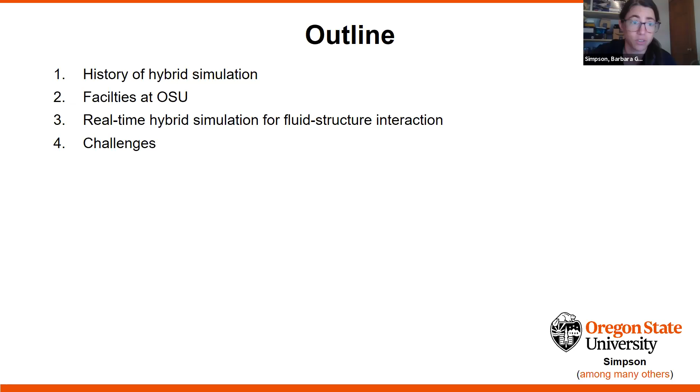Let's start with the history of hybrid simulation. I like showing this slide because it goes to show you how much times have changed. The original online testing method for hybrid simulation, the first publication, came out in 1975. There have of course been a number of instrumental works from the late 1970s and 1980s. When you think about how much computational power we have now compared to back then, it gets you thinking about what other problems we can start addressing, particularly with the growing emphasis on multi-hazards engineering and research.

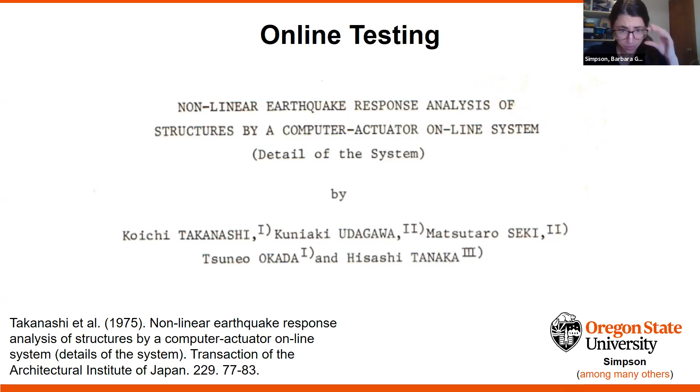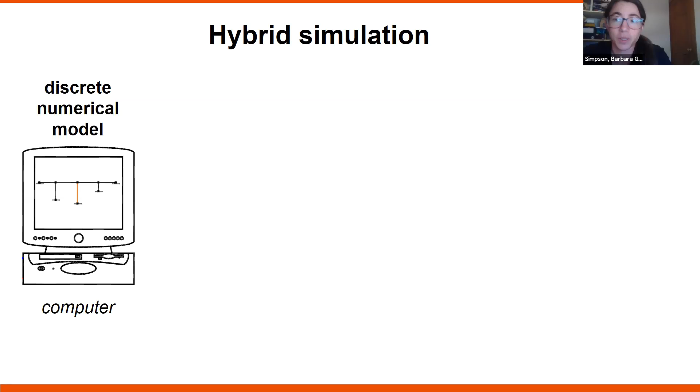When we think about hybrid simulation, we often think of it in terms of earthquake engineering problems because that's where it was originally developed. The entire idea of hybrid simulation is to take a model and split it up into some sort of numerical component that communicates with some sort of physical model in an experimental facility. This numerical and physical model are then coupled through the equations of motion, or whatever relevant physical equations there are, to couple these two systems.

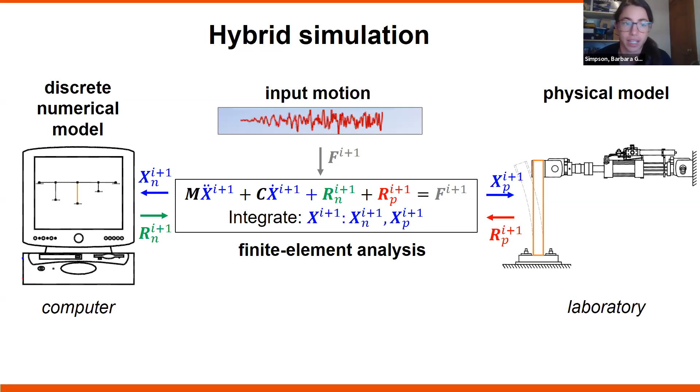Based on that equation of motion, you solve for the next time step, which gives you, based on an input motion, some sort of numerical and physical command in both the numerical model and the physical experiment. Then, based on that numerical displacement for example, you measure some sort of virtual resisting force in the numerical model, or from some sort of sensor in the physical model, and that feeds back into the equations of motion to solve for the next time step. So this hybrid simulation concept really combines a physical and numerical component.

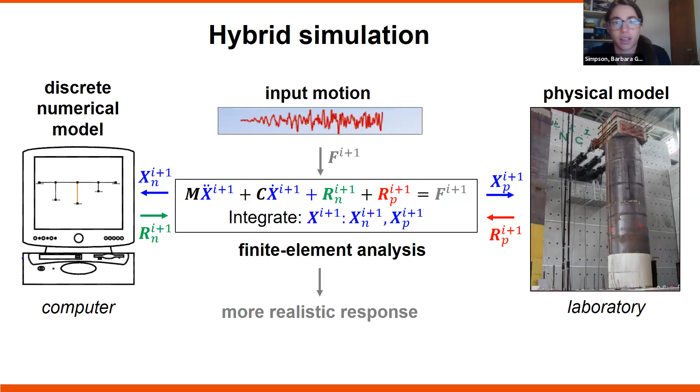Since you're actually testing a portion of the system in a physical laboratory, you can say you're combining the advantages of both worlds, numerical and physical, to get to a more realistic response. So that's the meat, or the idea, behind hybrid simulation.

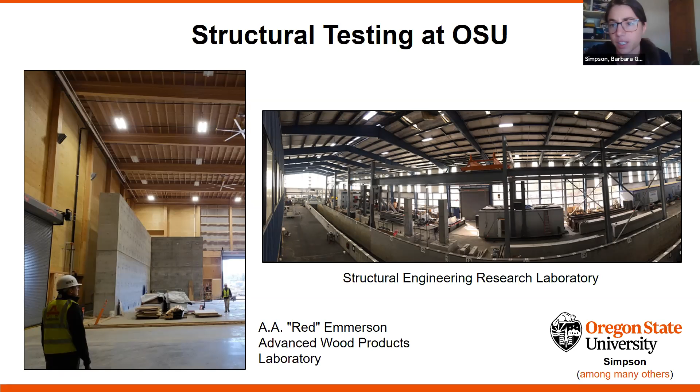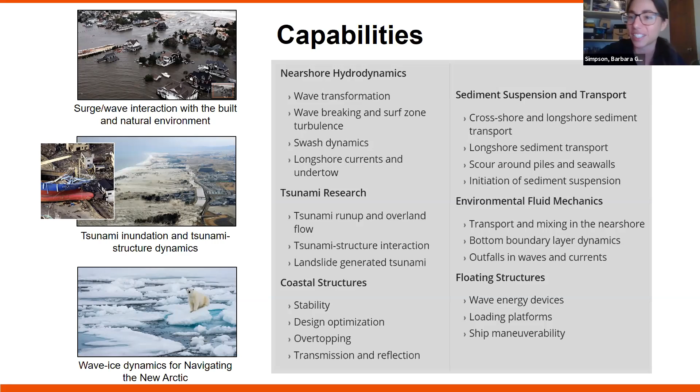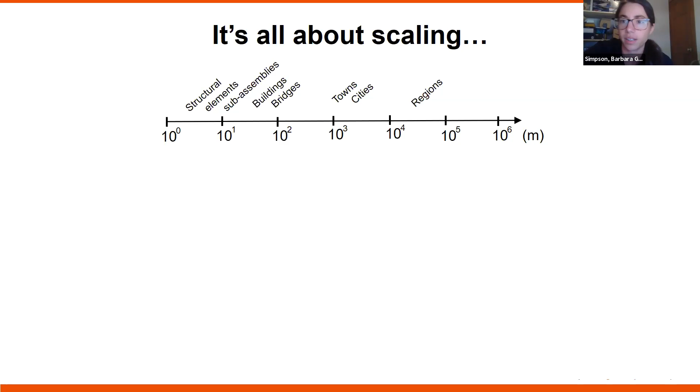For example, this was a test at 1-to-1 scale, but it's only a portion of a structure, or a partial subassembly. We can also think about testing a house, but again that house becomes small scale. And if we start talking about towns, cities, or regions, that of course comes at even smaller scale still.

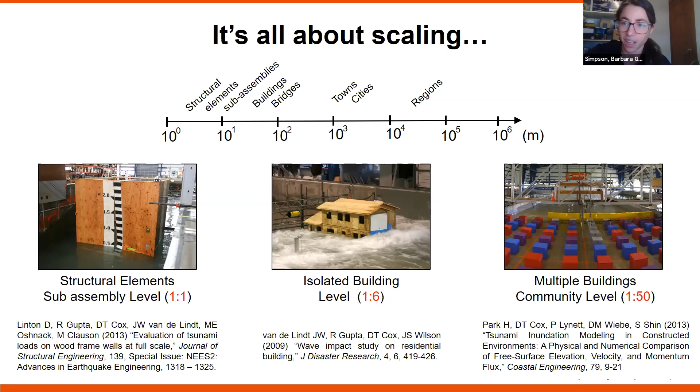So when you start thinking about how hybrid simulation can come into play in a facility like this, you really start thinking: how can hybrid simulation mitigate some of these scaling losses, or mitigate some of these scaling effects?

In a lot of these experiments, you're either making simplified or idealized boundary conditions. You're also, when thinking about scaling, often scaling according to the fluid and not necessarily the structural dynamics. Hybrid simulation is a concept that could help you mitigate some of these similitude requirements.

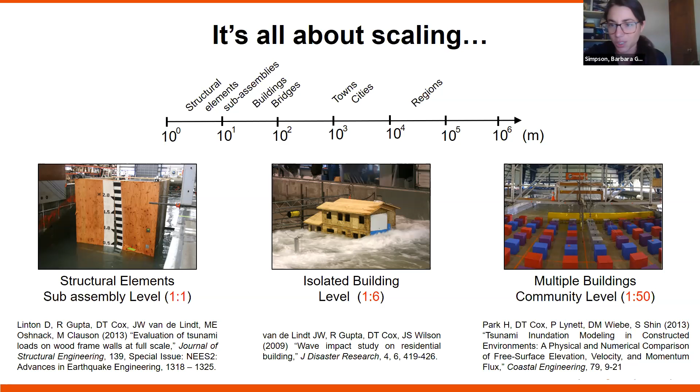So this is the experimental testing we're looking at in OSU's facilities. This is a recent experiment that demonstrates this.

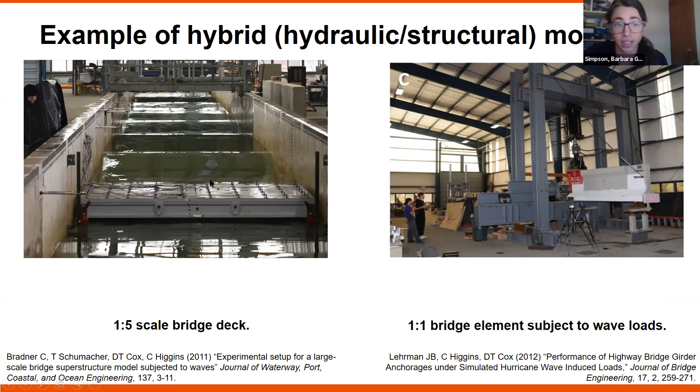On the left, we have a bridge deck, and it's actually set up with a spring. So when the wave hits this bridge deck, there's a fluid structure interaction component that includes the structural dynamics from the spring.

What these researchers did was take the load history they measured from load cells during this experiment and apply that to a full-scale bridge specimen. So they're starting to think of hybrid simulation not so much as how we traditionally think of it in earthquake engineering—combining a numerical component with a physical component through the equations of motion—but rather combining hydrodynamic testing with full-scale structural testing.

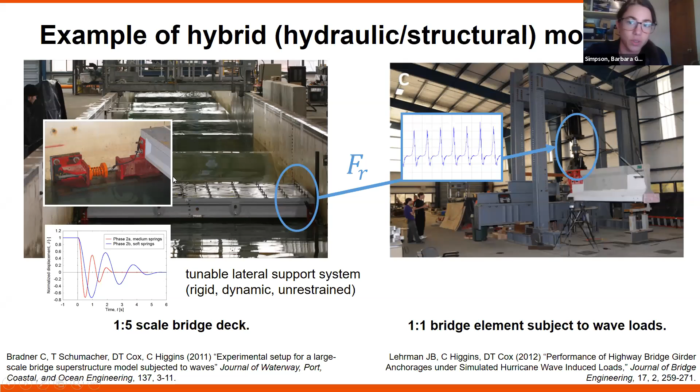So we can start thinking about hybrid simulation as something more than what we've traditionally thought about in earthquake engineering. These results are very interesting, mainly because of this figure on the left showing the actual dynamics of this bridge structure. What they found is that it actually influenced the response quite a bit.

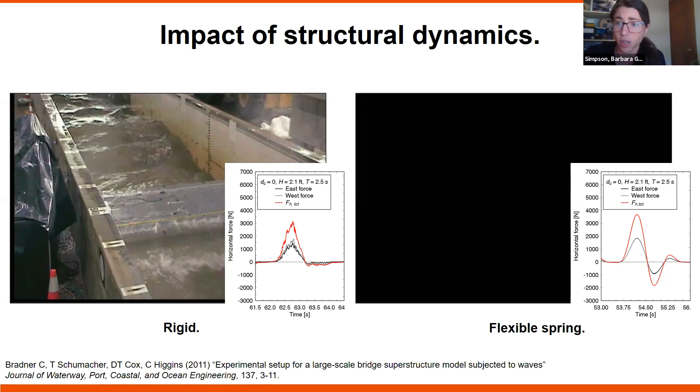As you'll see later, similar testing was also done by Denis Istrati and Ian Buckle at University of Nevada, Reno, and they found very similar results. So if you want to take into account the actual structural characteristics and dynamics, you need to somehow get around these scaling effects, because oftentimes hydrodynamic experiments are conducted at small scale and neglect a lot of the physical characteristics of the structure.

So that leads to this idea of hybrid simulation for fluid structure interaction problems. The idea of hybrid simulation, combining two things, a physical and numerical component, that stays the same. But then we can really start thinking about how we want to model this physical part and this numerical part, and how we can combine them in different ways to come up with more unique answers.

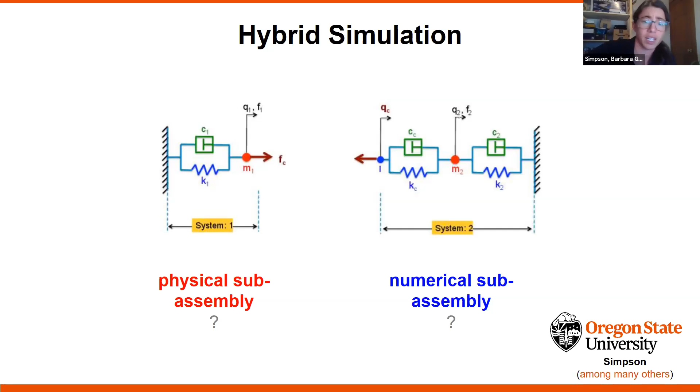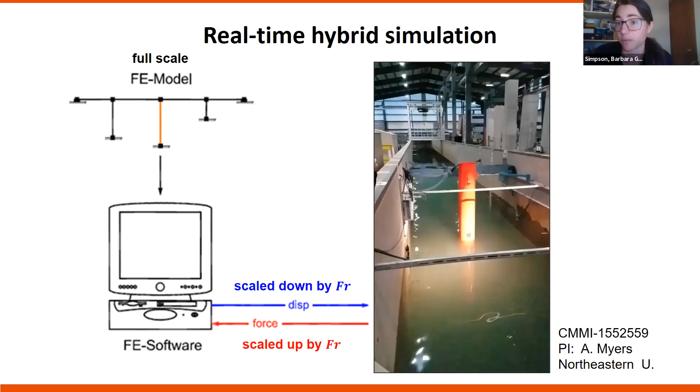And so you can imagine that because the structural model is at full scale, you can actually combine inelastic response at full scale, realistic stiffness properties, damping, for example, and then combine that with something that's small scale in the wave basin or in the wave flume. So you get around a lot of the similitude effects.

Now here's the problem. As much as I would like hybrid simulation to be like this, the fluid is actually always going to run in real time. There's really no way, no accurate way potentially of slowing down the fluid dynamics. So if this coupling is going to occur simultaneously between this numerical model and this physical model, it really has to be done in real time.

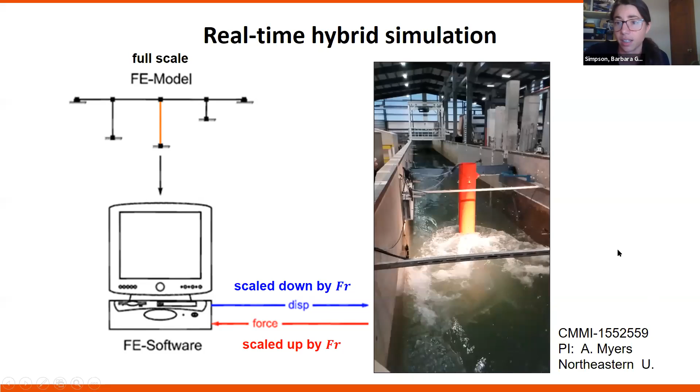And that really is the true challenge of implementing hybrid simulation for a fluid structure interaction problem, because whatever the fluid does, your structure has to interact with that fluid in real time if this numerical model is communicating with this physical model simultaneously. And so one can consider several scenarios for thinking about fluid structure interaction.

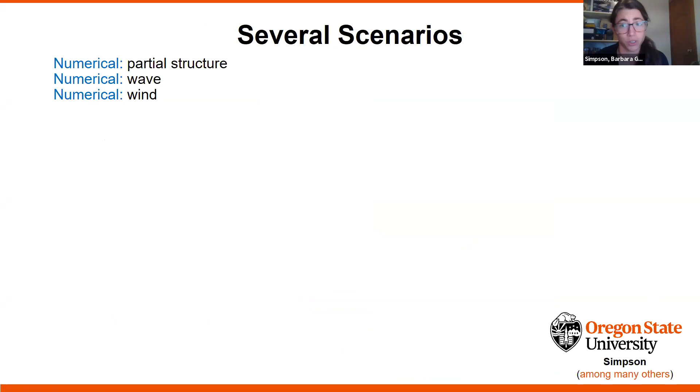So we have a numerical component that could be made up of a partial structural specimen. The numerical component could be the wave. If you're thinking about fluid structure interaction in general, you could start thinking about the numerical component as being wind. In the same way, you can think about the physical component as being any one of those things. So when we're thinking about partitioning a wave structure or fluid structure interaction problem, you're really thinking about where you are cutting the system between the wind and the wave or the structure.

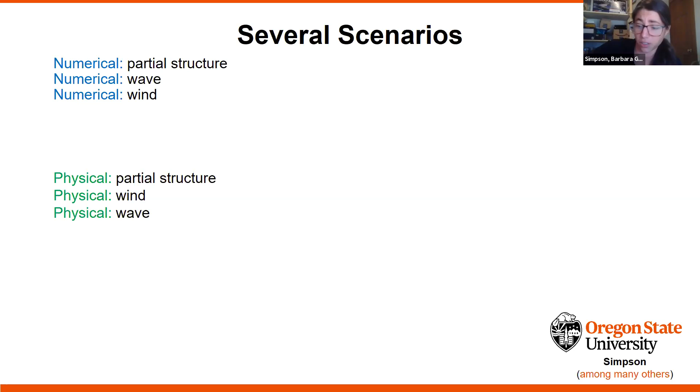On top of that, you can start thinking about multi-hazard scenarios. What if you're interested in cascading hazard? You have an earthquake, and you numerically damage the structure for seismic loading, and then you subject it to a tsunami in, say, the wave flume. So you can start thinking about hybridizing numerical and physical components in a number of different ways.

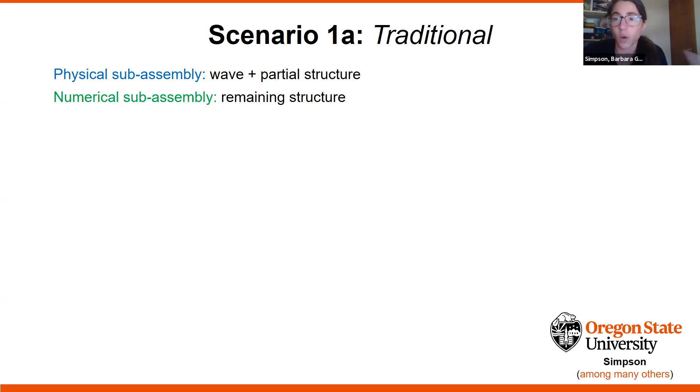So let's look at that first one, and I'll call it the traditional scenario, where you have a physical subassembly that's the wave and a partial part of the structure, and then a numerical subassembly that's the remaining part of the structure. You'll notice I'm calling them subassemblies instead of substructures. In the literature, oftentimes when partitioning this set into numerical and physical components, they're referred to as substructures. I'm using subassembly here because you're also including the wave as part of it — it's the wave plus structure. So we look at this traditional approach.

What we're doing is taking a complete assembly, let's say of a building that's being impacted by tsunami loading, and splitting it up into two parts. One part is the physical subassembly, and the other part is the numerical subassembly. Combined, it represents the response of the complete building.

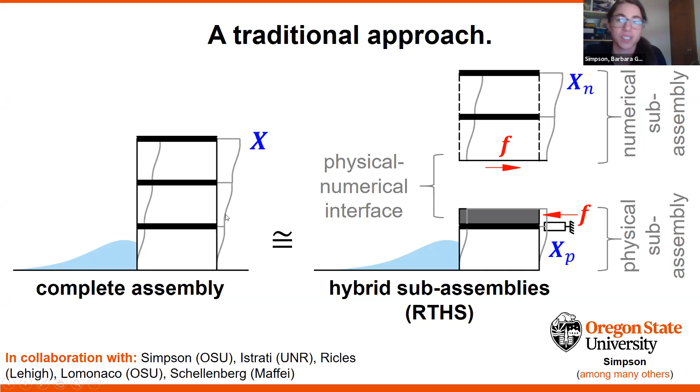Basically, the hybrid simulation component is at the interface of this physical and numerical part. You enforce the interface conditions, the interface forces, as well as compatibility between the displacements. So this XP and XN, which are the physical displacements and numerical displacements, actually reflect the displacements of the system as a whole. That's the traditional approach, and there are a number of advantages to just having a numerical model extend your existing facility.

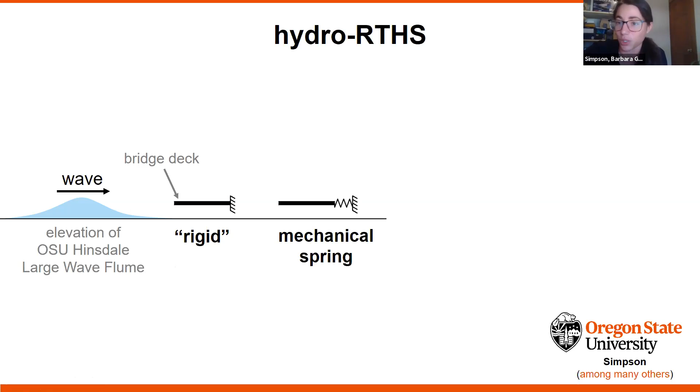So if we start out and go back to that bridge deck example, if we're thinking about a rigid bridge deck, we're not capturing that structural dynamics. We could implement some sort of spring, exactly like that previous study did, where we can then have some structural dynamics with interaction between the structure and the fluid incorporated into our physical experiments.

But we could go one step further, and why not replace that single spring with a single stiffness with some sort of actuator that's able to represent an infinite range of stiffnesses. And if you're going to put an actuator there, why not take it one step further and virtually extend your wave facility? By implementing hybrid simulation for wave structure interaction problems, you can test something infinitely more sophisticated than if you were just thinking about it only being an experimental facility, because now we can test an entire bridge rather than the bridge deck. So you're really increasing the sophistication of your bridge model.

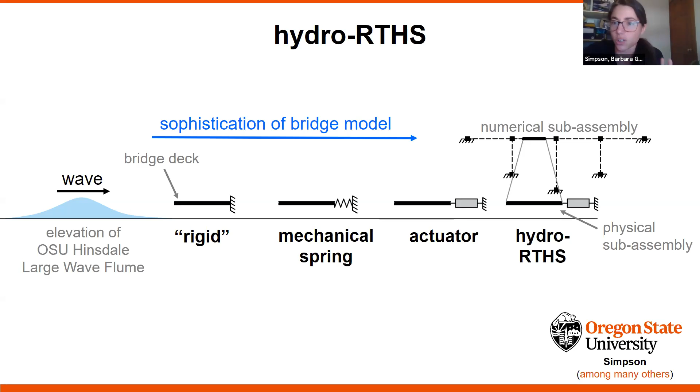So that's this traditional approach where your numerical model is really the remaining part of your structure, and that's interacting with some sort of component that you're testing in your physical facility. Now, what are the advantages of this? Assuming that you know how the structure is modeled and you're really confident in your structural part of the model, then you get really efficient testing of the wave.

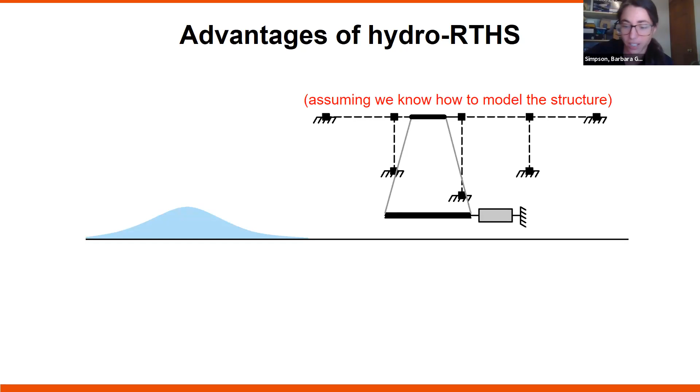Because if you think about computational fluid dynamics problems, they're very computationally expensive. It's a very difficult computational environment. So you can actually run a wave, an order of magnitude faster in a physical sense than it would take to do it computationally. So you get efficient testing of your wave.

The wave itself is also still physical, and the way it interacts with the structure is also physical. So you're reducing uncertainties because you're modeling this very complex interaction between the wave and the structure physically. You're not making any assumptions about that interaction other than the assumptions you would typically make in any sort of experimental test.

On top of that, on the numerical side, you get all these additional complexities gained through the numerical model. So you could start looking at something much bigger or more complex than you'd be able to test on its own in a wave facility, just because we have size limitations when it comes to the Flume and the Basin.

You can also think about having that structural component at full scale. So a lot of the structural behaviors and responses are at full scale, and then it's interacting with the fluid at small scale. So you're able to mitigate a lot of similitude requirements.

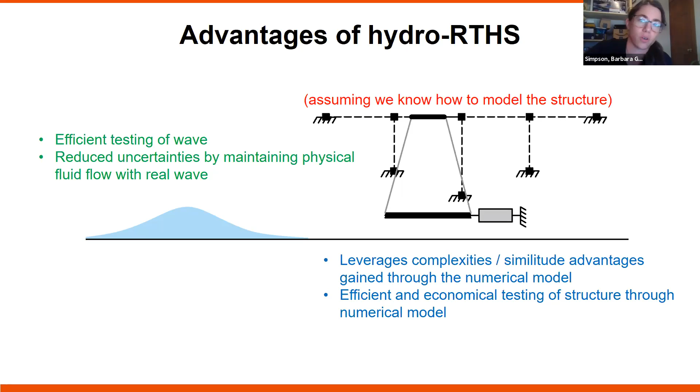On top of that, you can swap out this numerical model quite easily. So you can imagine testing a number of different structures or different parameters in the structural model, all by using the same test setup. So you're getting a lot of efficiencies gained by this coupling of numerical and physical components.

So that was the first traditional approach, the remaining structure is modeled numerically, but in your facility, that wave structure interaction is modeled physically. This traditional approach could also be reversed. So we could think about the same scenario, but instead of the remaining structure being numerical, the remaining structure being physical, we could flip it.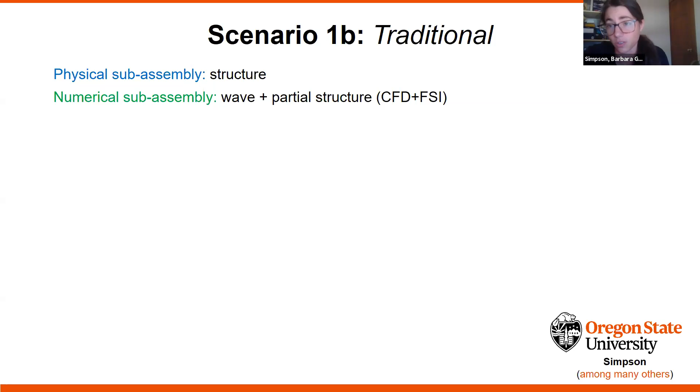We could say that our wave is going to be numerical, interacting numerically with some sort of structure, and then the remaining structure is going to be physical. So what that would look like is maybe something like this. These are some photos I actually borrowed from another presentation. You can imagine the fluid is actually a computational fluids model applying some loading to a structure, so it's the reverse of what I had previously shown.

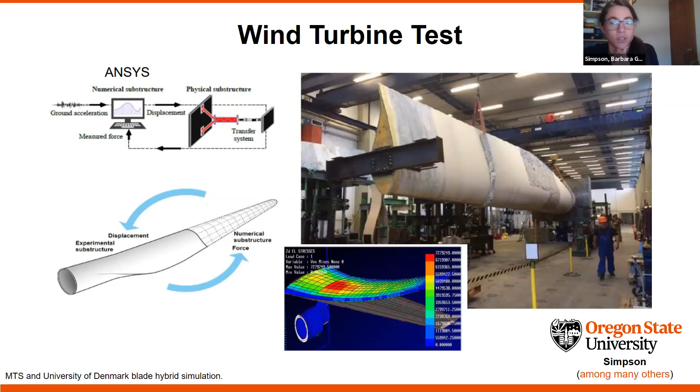So now you can start thinking about a number of different ways to partition the system. Now, all of this becomes a little more complicated when we start doing fluid-fluid structure interactions. For example, in hurricane loading, we're often not only interested in the waves, we could also be interested in the wave, surge, wind, and structure interaction. So you can imagine a number of different scenarios where you're combining not just the structure and one fluid, but the structure and multiple fluids.

So for example, we could think about a physical subassembly where we take a wave and a partial structure and model that physically in a wave basin, and then it's going to be interacting with a numerical subassembly that could be the wind that's modeled numerically and the remaining structure.

And so what you start really getting into is combining all these different scaling laws when you're dealing with multi-physics problems like this one, where you have an elevated structure being subjected to waves, structure, and wind. And so when you scale something down to small scale in a wave basin or flume, you're wanting to satisfy several conditions.

One is that you want it to be of similar shape, so whatever you have at full scale, when you scale it down to small scale, you want it to follow geometric similitude. You also want to have kinematic similitude, where you have similar velocity and flow of the fluid at small and full scale.

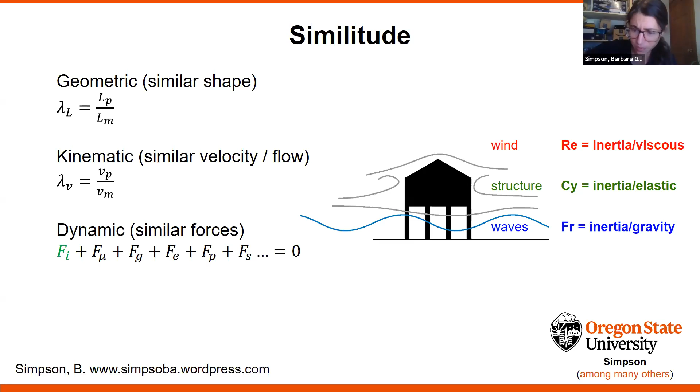And so if you're looking at a small scale experiment, you only get to choose one of these. That means the scaling for all the other parts of your problem is not necessarily compatible with the scaling law that you choose.

So for example, if we were to choose Reynolds scaling, I've plotted the time scale on the vertical axis and the length scale, how much you're scaling down, on the horizontal axis. To make sure that Reynolds number is equal, so that your inertial to viscous forces in the full scale and model scale are the same, you have to change the time scale. This plots that relationship with respect to Reynolds scaling, which is for your wind.

If you do the same thing for your waves, you're looking at the ratio of inertial to gravitational forces, so you get a different relationship between time and length. And finally, if you plot your structure according to Cauchy scaling, you get another relationship again between time and length.

Really, the only time these similitude laws have equivalent time scales is at full scale. So any deviation from full scale means you're dealing with incompatibilities between the scaling laws. Looking at the dynamic equations of motion, this means you get one force that's equal between full scale and model scale, but the other forces will shift based on the similitude law you employ.

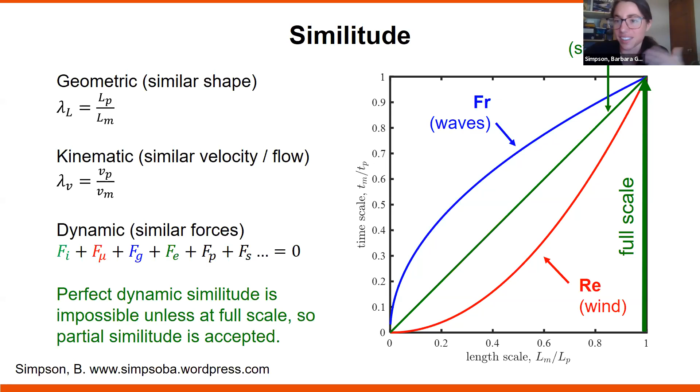Because of this, even though you want perfect dynamic similitude with the dynamic equations of motion being the same in the full scale and small scale model, it's actually impossible to achieve all of them. So you often do partial similitude, where you select one of these laws and scale your experiment by it.

So when we start thinking about facilities where you have fans applying wind over a wave basin, using a small scale model, and I'm just showing three here, you're actually subject to incompatibilities between the scaling laws used for the wind and the scaling law used for the waves.

And I'm disregarding the scaling laws for the structure entirely. So you can actually say, well, maybe even though you're applying wind in a wave facility, that dynamic similitude between the wind and the waves is not quite correct. On top of that, you're dealing with

Difficulties in applying wind in this way. So you'll notice that in these cases, the fan is very, very close to this model of this offshore wind turbine. And that's because there's only a small volume in which you get a fairly good wind field in front of this distribution of fans. So you want to make sure that you're able to represent that, but it's only in a very, very small volume within this

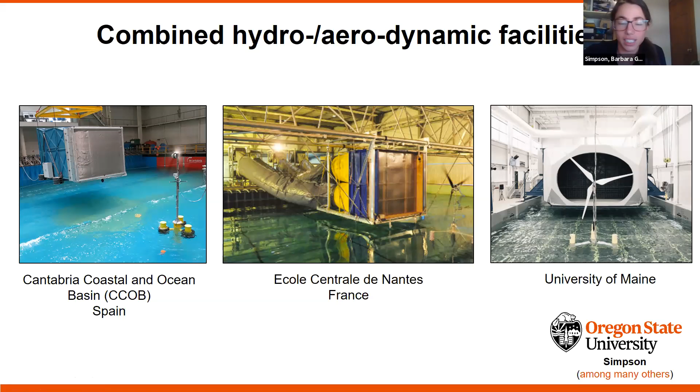Wind flow in this wave basin. So there's all sorts of difficulties when thinking about how to apply wind and waves, both physically, in the same wave facility. So instead, you could maybe think about it in terms of a hybrid simulation approach.

This is a project recently funded by the Department of Energy, so you can think of a floating offshore wind turbine physically modeled in a wave basin. But instead of trying to get around any similitude requirements between applying wind and waves, both at small scale, both in a physical setting, you can say, I'm going to model the wind numerically. In which case, the numerical wind and maybe any sort of properties associated with the structure could be at full scale and interacting with whatever specimen you have floating in your basin, which is scaled by Froude scaling, which accounts for those gravitational forces that tend to dominate the response when you think of wave loading.

So this is one way of thinking about this problem of similitude. You can think about it in the opposite sense. So instead of having the wind be numerical and the wave be physical, we could flip that around, and we can have the wind be physical and the wave be numerical.

And so what that might look like in a wind tunnel facility is you have, again, an offshore wind turbine, but instead of the wind being numerical, you have the wave be numerical. And so now this Stewart platform is actuating the motion of the wave, which is then causing this floating offshore wind turbine to move, which then affects the wind flow, where the wind flow is physical.

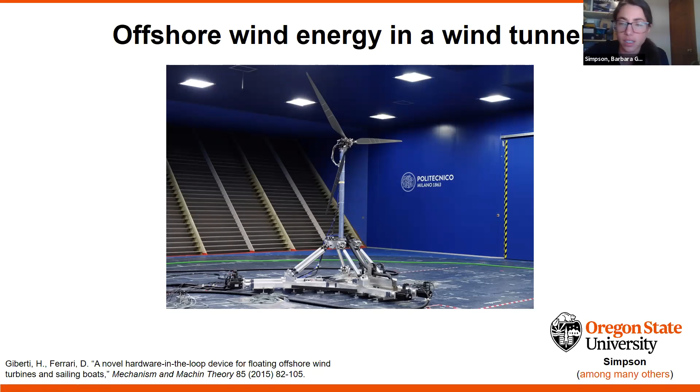So there's lots of different ways that we can start thinking about partitioning the system in terms of numerical and physical components.

We could take that one step further and say, well, rather than have any component of this system be numerical, what if we just want everything to be physical? In which case I want a physical wave and a physical wind, and then I'll have a partial structure in a wind tunnel, and the remaining structure will be in the wave basin, and that'll all be coupled.

And so then you can start thinking about having two separate facilities, maybe testing at fairly large scale. So for example, we could have the wave basin or the wave flume here at OSU, and then we could think about modeling the wind at the wall of wind at say one of the other NHERI sites. In this case, I have Florida International University, so wall of wind.

And then you can imagine some sort of communication occurring between Oregon and Florida, where whatever we're doing in our facility is according to Froude scaling, and then we're coupling that in some way, potentially through the structure, to whatever is being done at a wind facility, which is using a different scaling law, or, if possible, at full scale.

Now, the issue with this is that you're talking about really, if you're still dealing with a real-time hybrid simulation, then you're talking about real-time communication between Oregon and Florida International University. And as I stated previously, because everything's at small scale, you're actually dealing with faster than real time in a lot of cases.

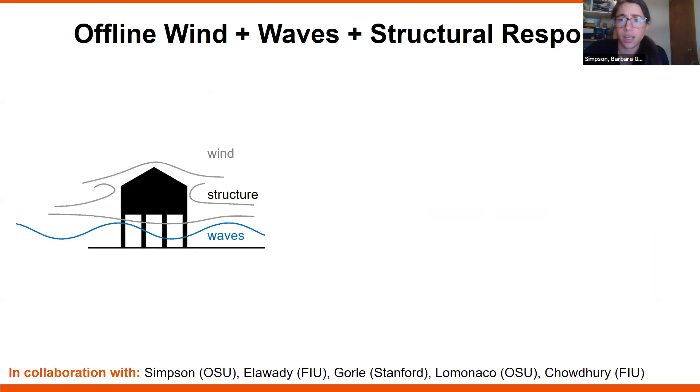So for example, if we're thinking of this elevated house again, where we have the waves, the structure, and the wind, we can start thinking about more of an offline hybrid simulation approach. We could have a portion of the structure that's submerged at a wave flume or wave basin, and then have the same model with the same geometric characteristics in the wind tunnel. You can imagine measuring the wave profile and surge height at the wave facility, and then having some sort of offline actuated boundary layer at the wind facility.

And so you're assuming a lot of things here. Number one, you're assuming that the interaction between the wind and the waves is negligible. And you're also neglecting a lot of the structural deformations and the effect that might have on the wind and wave flow.

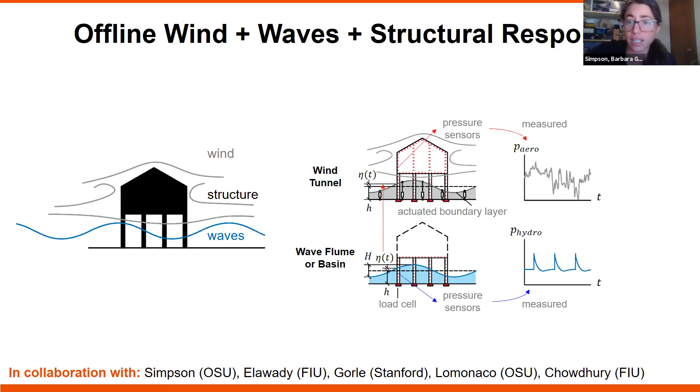But if you were to do this in this offline environment, you could measure pressure histories at the wind tunnel or the wave flume or basin facility, and then apply those pressure histories into some sort of deforming structural model. In this way, you can have different scaling laws for all parts of your system.

So you could have your wind be for Reynolds scaling, your wave be for Froude scaling, and then when you apply that offline to your structural model, that could actually be at full scale and have full scale structural characteristics and dynamic properties.

Now the issue with that is you're making an important assumption, that your deformations do not necessarily affect the fluid flow. Doing the reverse of this, where the deforming structure actually also affects the fluid, would be the case for any high damage situation or any structure undergoing large displacements, which would also affect the loading conditions. That's not taken into account in this scenario, where you're going from one side of the problem, just loading, to the other side, the structural deformations.

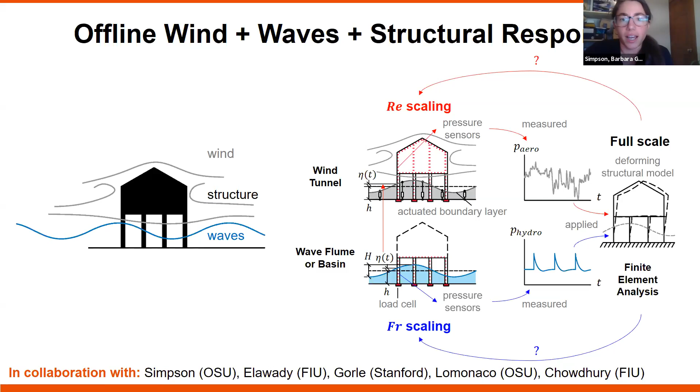But this could be one approach when thinking about coupling geographically distributed facilities. So rewinding a little bit and starting to think about challenges.

There's a number of reasons for why you would want to do hybrid simulation for fluid structure interaction. One is that physical models are at small scale, and it's very difficult to scale the fluid along with the structural properties. And if you're combining multiple fluids, that similitude becomes even more difficult, because you have different scaling laws that govern, for example, wind versus waves.

You're often neglecting potential structural dynamics effects or fluid structure interaction effects, which could be non-negligible, as you saw at the very beginning of this presentation with that bridge experiment. So you could really say that because we're not able to test at full scale, data is limited for certain types of problems.

On the computational side, you're dealing with a very uncertain environment. It's very computationally expensive, and at the end of the day, if you're building a computational model, it needs experimental validation. So when you think about the question, why hybrid simulation for fluid structure interaction, it's because of this paradox between the physical models and the computational models. You need physical models, physical experiments and physical data to validate your computational models.

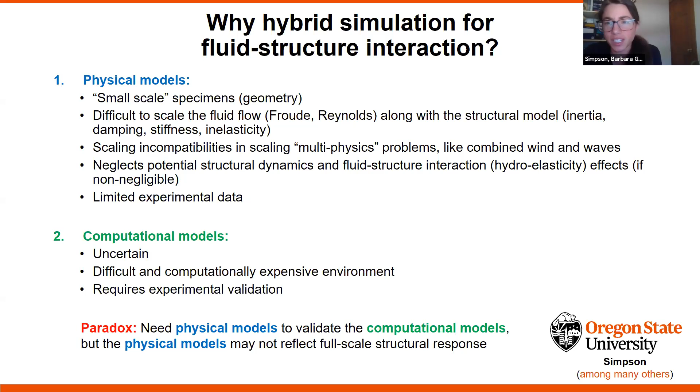But your physical models might not necessarily represent full-scale structural response, because of the many simplifications we need to consider when testing, including idealized boundary conditions, small-scale effects, etc. And so there's a need to do hybrid simulation for fluid structure interaction problems, but it's not exactly simple. There's a number of challenges that need to be considered.

So while hybrid simulation can be considered mature for, say, earthquake engineering applications, when we're thinking about wave structure applications, we have to think about a few other things.

One is this real or faster than real time issue. Since the fluid is not going to slow down for you, if you want your numerical model to interact with your physical model simultaneously, then it has to be satisfying the equations of motion, or solving the equations of motion, in real time, or even worse, faster than real time, due to similitude requirements.

As you scale down your model to fit in your flume or basin facility, you're also dealing with a time scale that shrinks, meaning that it has to be faster than real time. So whatever computational model you have, it has to keep up with what's happening physically, unless, of course, you do something offline, like what was presented a few slides earlier.

This becomes really problematic when you're trying to numerically model parts of this problem that involve fluid. Depending on the numerical model, or if you're using computational fluid dynamics, that's typically slow, so thinking about how the numerical model can keep up with your physical model is difficult. There are a number of different models you can use for fluid flow, and I'll leave that as an open question, but this is definitely one of the primary challenges I consider when thinking about wave structure interaction.

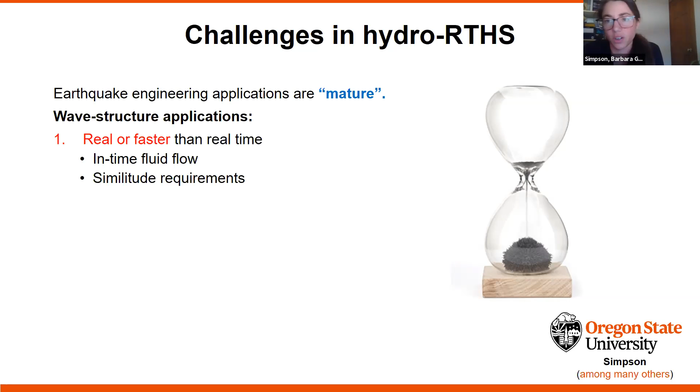But when you're thinking about real-time hybrid simulation, it needs to be fast if a wind or wave component is modeled physically. The other thing to consider is that these wave structure interaction problems are not like the typical problems we see in earthquake engineering. First off, you're dealing with pretty high frequency pressure effects.

A lot of the collaborators I work with would rather do force control rather than displacement control, though it depends on the problem. On top of that, you're dealing with forces that are much smaller than the forces we deal with in very large scale structural applications.

A lot of this could potentially be mitigated by the fact that if you have a flexible structure, you'll actually get a different set of frequencies in the force versus the pressure response, and so a lot of that high frequency response goes away.

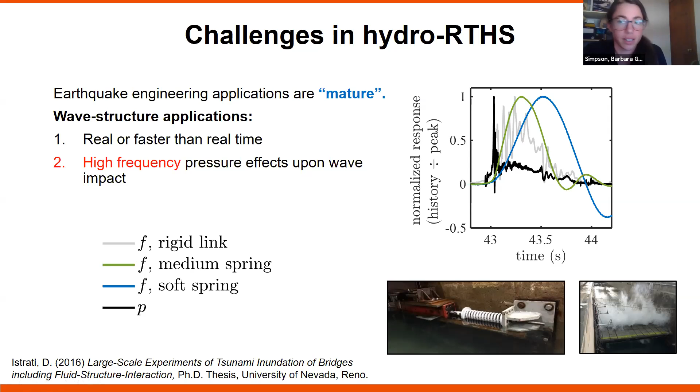This was seen extensively by Denis Istrati, who did very similar experiments to what was done with that bridge and spring I showed earlier in the presentation. So this is alleviated somewhat if you incorporate the structural dynamics into the system, but it's still something that needs to be considered, and it can be difficult on the control side.

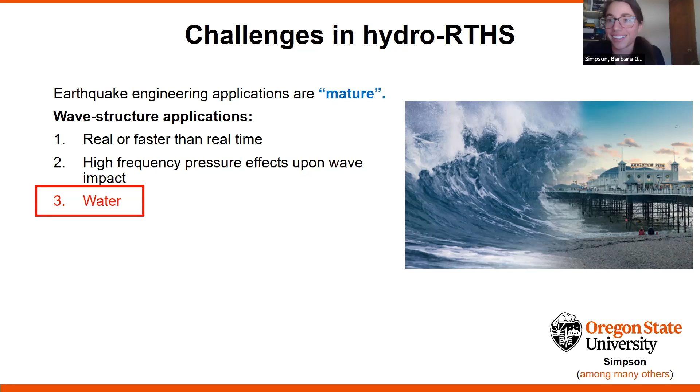The third thing I really want to emphasize is that this is all being done in water, so anything you do really has to be waterproof, and any equipment has to be protected. In a lot of cases, the typical actuation schemes used for earthquake engineering, including hydraulic actuators that supply very large forces, might not be the same actuation scheme you want when dealing with a water setting where you don't want oil mixing with water, you're dealing with much smaller forces, and you want your actuator to be potentially waterproof if it's going to be submerged in any way. Thinking about that is definitely something that can be a bit challenging.

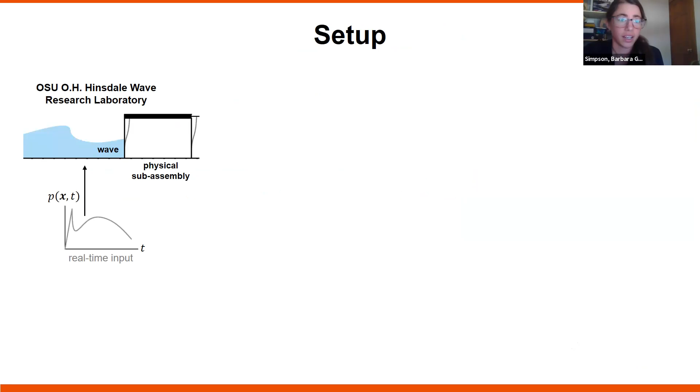We've attempted to address all of these challenges here at Oregon State. When we think about our setup, we already have a wave basin and wave flume at our Hinsdale Wave Research Laboratory, so we can start thinking about an actuation scheme that, number one, is placed so it does not affect the fluid flow, but number two, is also waterproof.

We've actually got a custom waterproof electric actuator, so it's electric instead of hydraulic, that we've purchased to do hybrid simulation. You'll notice I've listed the forces, the stroke, and the speed here, and the force, 10 kips, is actually on the high side for a lot of what's seen in hydrodynamic experiments. So you're looking at a waterproof electric actuator, which doesn't have exactly the same dynamics as you might see from a hydraulic actuator.

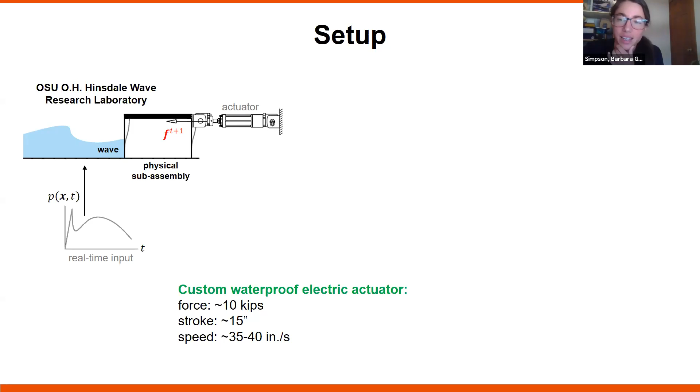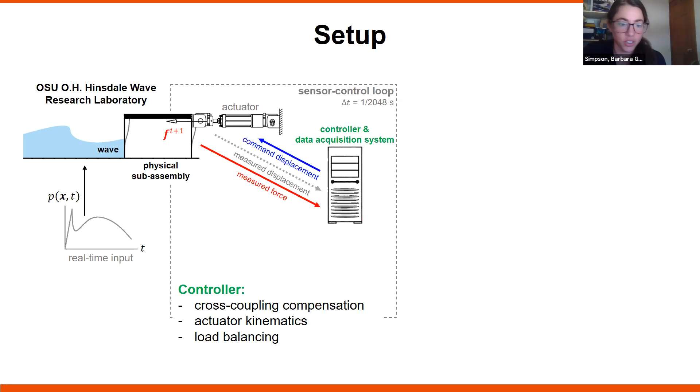That's being controlled through some sort of controller and data acquisition system, where it's sending, in the case of displacement control, some sort of command signal, and then measuring some sort of force on this partial specimen. That's communicating on the other side with the remaining numerical model. Then we have a simulation host computer, which we're using the OpenFresco approach for. The OpenFresco middleware is also housed on the simulation computer along with your finite element analysis software that is emulating the numerical parts of the model.

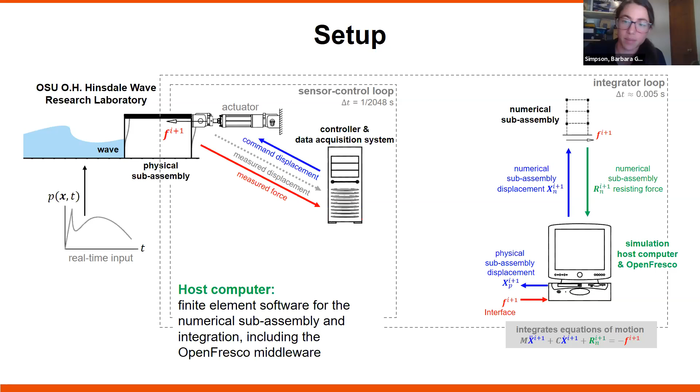Because your sensor control loop might be operating at a different deterministic timescale than the one used in your numerical finite element analysis, you can imagine some sort of rate transition or predictor-corrector loop being housed on a real-time target computer in the middle. So at least for right now at OSU, we're using this 3-loop architecture to conduct our hybrid simulation experiments. That doesn't mean we can't do something else in the future, but this is just what we've had right now.

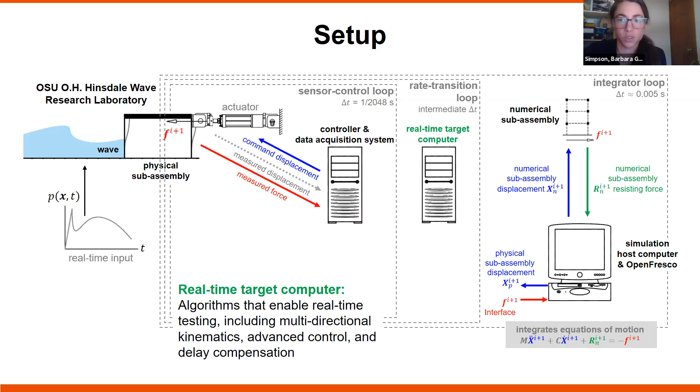How these are all coupled together is that we have the SCRAMNet+ shared memory network with fiber optic cables that enables real-time or fast communication between each of these components. As far as the hardware we've implemented at OSU, it's fairly traditional, and this sort of architecture has been well documented in past studies.

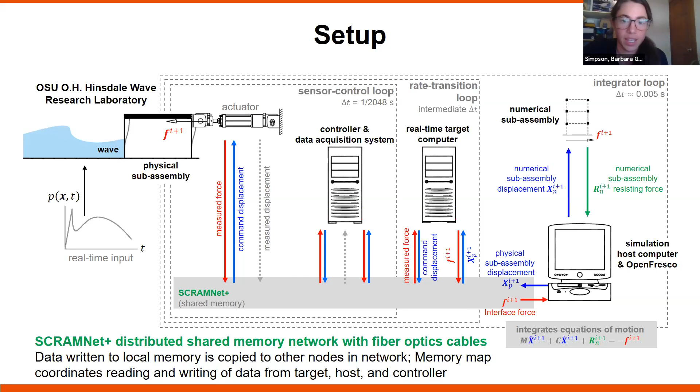What might be a little different is the fact that our computers glow in the dark. On the left here is Andreas Schellenberg, who's been working a lot with us implementing hybrid simulation here at OSU. Then there's a figure of me next to these two giant computers, our target and host computers on the right. These are custom machines that Andreas and I built together, and I just feel like I need to show this image because I'm rather proud of them. They are very fast, faster than the current SpeedGoat machines, and we're hoping to have documentation for this online and open source soon.

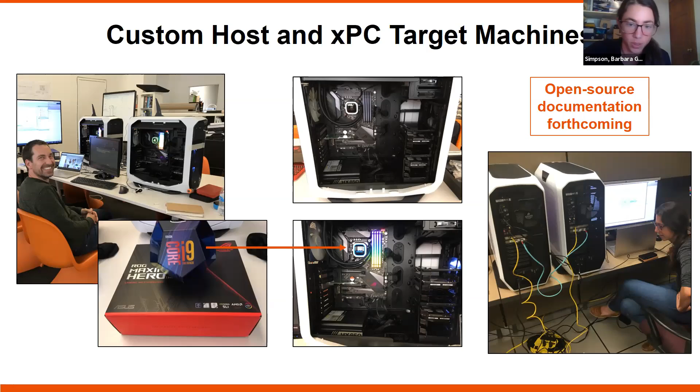And so that leads to the final part of this presentation, and I already feel like I'm talking really fast. Okay, I'm still good on time. That's good. I should have slowed down a little bit.

On top of that, you're dealing with this fluid component, so it's not just structural dynamics, it's also fluid dynamics. I've been interacting with a lot of coastal engineers, wind engineers, as well as electrical engineers, and it's interesting how the language between all of us is so different. Really thinking about hybrid simulation as a multidisciplinary endeavor is important, and being able to communicate ideas matters because you'll find you're talking about the same thing, but since someone's in a different discipline, you don't quite understand what they're trying to say. So implementing hybrid simulation for fluid-structure interaction requires a multidisciplinary team of people with very different backgrounds.

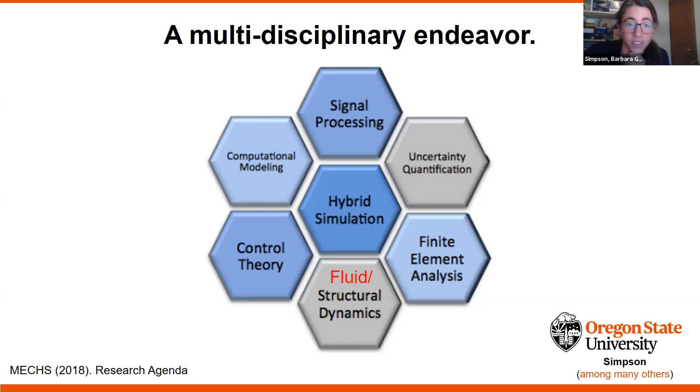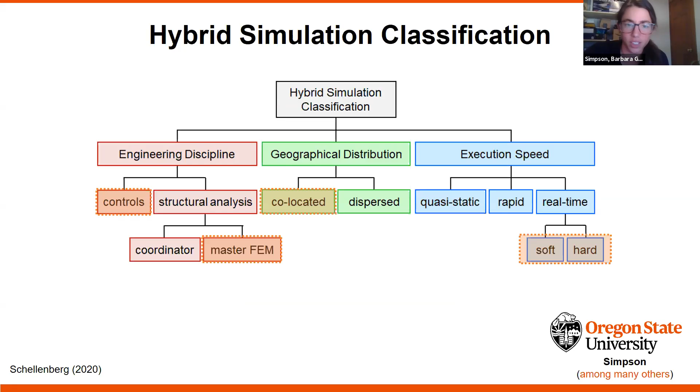To give you an idea of what's coming up, we're expecting to test in December 2020 a pilot test for hybrid simulation, real-time, and fluid-structure interaction problems. There are a number of different collaborators involved in this project, and I want to point out that Christopher is the graduate student working on this project. Even though I'm presenting this work, really he's the main person working on it. This whole setup for the pilot test is very much what I initially showed in those original photos.

So we have a numerical subassembly, which is really the majority of a bridge, and then we have a pier and the fluid-structure interaction component that's being modeled physically. They're coupled together through the equations of motion. This is a very classic approach to hybrid simulation, and as a pilot test, we think it's important to approach this problem from a traditional standpoint first.

So what we have is this existing physical specimen that was actually used for a previous NSF project. That specimen is pinned at its base, and an actuator and load cell will be supplying the remaining structural response at the top of that pier.

Our numerical component is, of course, the remaining bridge, but we're also going to have some numerical modeling of plastic hinging at the base of the shaft, or potential soil structure interaction characteristics. What's interesting about this model is that we can subject it to previous earthquake loading, getting a previous damage state as if an earthquake happened first, and then look at it under tsunami loading in our wave flume.

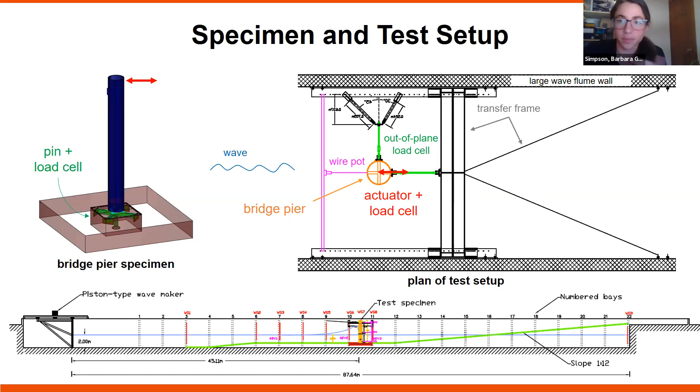So this is what the specimen looks like. Again, you have that pin, and then we just have an additional load cell at the base that's not really used for the hybrid simulation, but it's there to measure what's happening at the base of the specimen. Then we have a wave impacting this pier that's already been damaged by the earthquake, and we have an actuator plus the load cell that's coupled to the remaining numerical model.

The numerical model we're using is actually an existing model documented by many others, but what's interesting is the way we've done it. We have a pin at the base of this experimental specimen, so we need to make sure that the numerical model plus physical model actually satisfies equilibrium.

So we have a spring modeled at the base of our numerical model that represents any plastic hinging from previous earthquake loading, or any soil structure interaction effects. We also have the remaining bridge deck, and the pier in the numerical model is actually modeled as rigid. That way we can condense out some of the degrees of freedom that we don't necessarily have in our physical model.

We then have a load cell and an actuator at the top of the pier. We can supply some loading history through the wave, some distributed loading, and then supply some physical displacement, and monitor some resulting force.

Based on this, we go back to the 3-loop hardware architecture where we're using displacement control, supplying the physical pier with displacement, measuring the resulting force, and coupling that to this model of the remaining bridge. So that's the pilot test we're expecting to run this December.

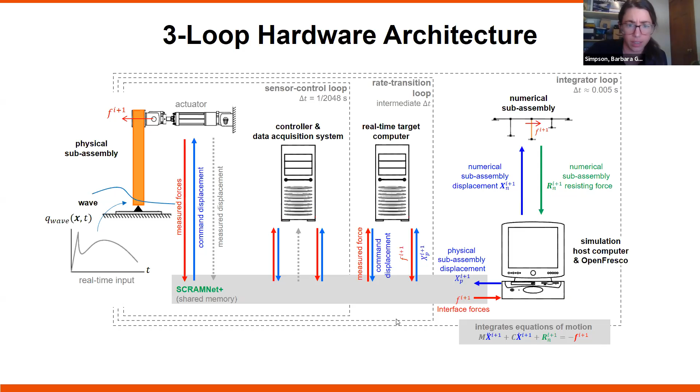When we're looking at some of these other problems, where you're dealing with something that's maybe not a classic structures problem, you might use a different integration scheme. We're still in the process of looking at how this coupling is going to be performed in this case, and whether it's going to be displacement or force control or something of that nature.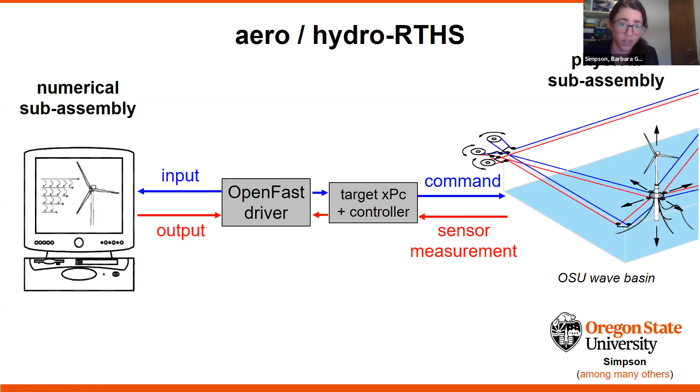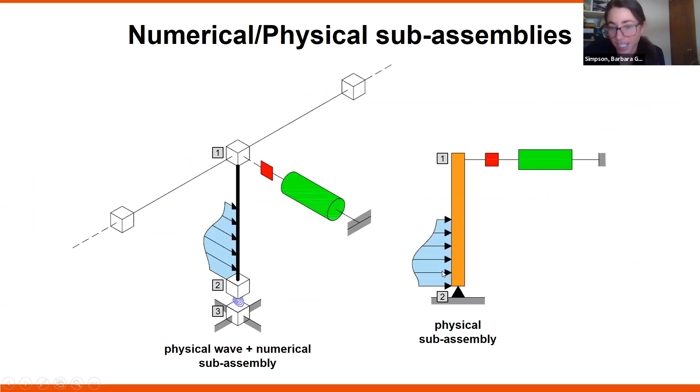As far as the fluid structure interaction and the integration scheme question, really the fluid only comes into play in a classic sense. When you're looking at this set of equations of motion, you're really only monitoring the structure's response, so it's just a classic structural engineering problem at that point.

Does OpenFAST need further software to run an actuator, like MATLAB or Simulink? Yes. There's a number of different ways that we could utilize OpenFAST.

One way is in this 3-loop architecture I've already shown, where OpenFAST is housed on its own machine and solving for the next time step. But to do that, you need to somehow separate it out. The nice thing about OpenFAST is that it's modular—each part is coupled together through a glue code, and those parts could be the mooring dynamics, the structural dynamics, the aerodynamics, etc. So you can imagine creating your own experimental module that you insert into that modular setup, and then communicate with the glue code.

There's also an open source Simulink function you can utilize that has OpenFAST embedded directly into Simulink.

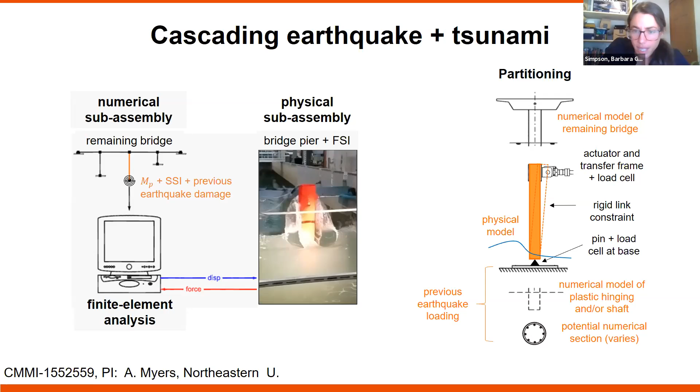A lot of the studies to date, for example, and I'm sorry if I'm going through these quite fast, this figure on the right is actually modeling the mass physically. For researchers familiar with hybrid simulation, that could lead to a lack of mass in your numerical model, which could potentially lead to stability effects. So where you put that mass in the numerical versus physical system, and making sure that whatever you do physically still has the responses you're interested in, becomes really important.